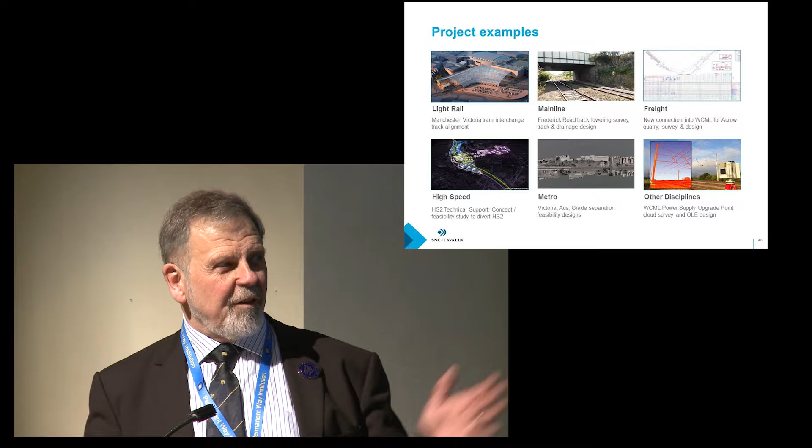I had to try and think of something to put in other disciplines, but what I've picked is the work we've done on the West Coast Main Line power upgrade, and the use of advanced survey techniques to allow us to see where the overhead line equipment is. We just saw a really good example of that as well with the Stafford Alliance, trying to work out where a gantry is relative to the overhead line wires. But the same technology and the same techniques are used in the initial design and the design of overhead line upgrades.

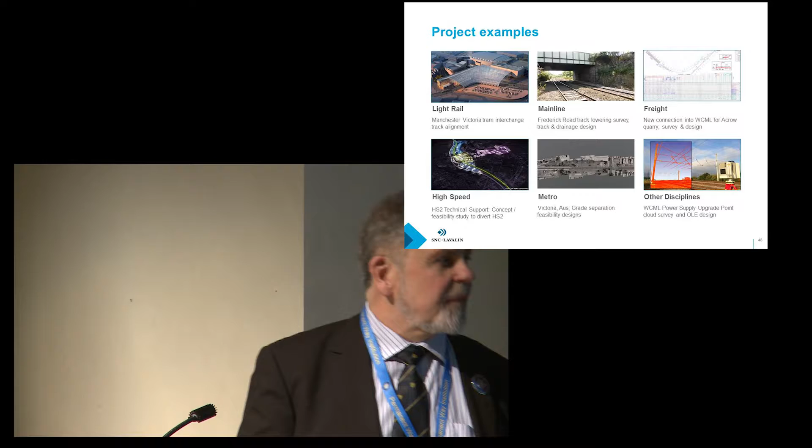But the important point is it comes back at some stage into operations and maintenance, and I think as designers we must never lose sight of the fact that what we're designing has got to serve a purpose and ultimately become an asset that provides the railway, and then has to be operated and maintained.

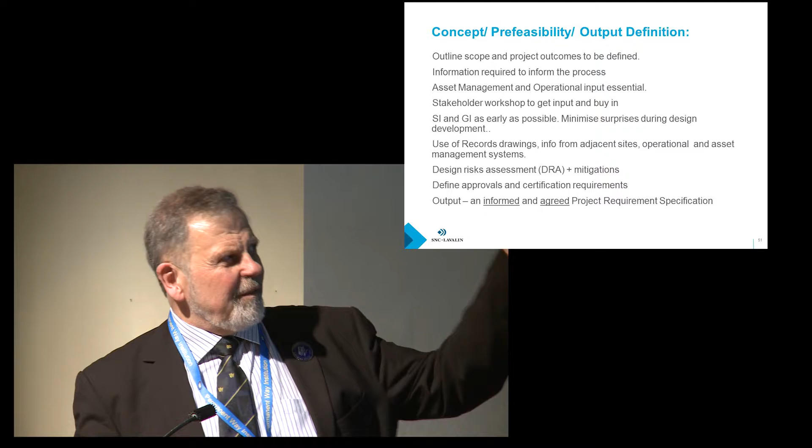Obviously, there are numerous stakeholders in any project, so get them together, get their information, and get that downloaded.

Invest in site investigation, invest in ground investigations, invest in whatever survey requirements you need at that stage. Often not a popular decision to spend money up front at such an early stage in a project, but if you haven't got the records and information available, do get that information and use it in your deliberations as you start to define what you're trying to achieve.

I've mentioned the drawings. It's often the case that adjacent projects or adjacent works can feed quite useful data into the process.

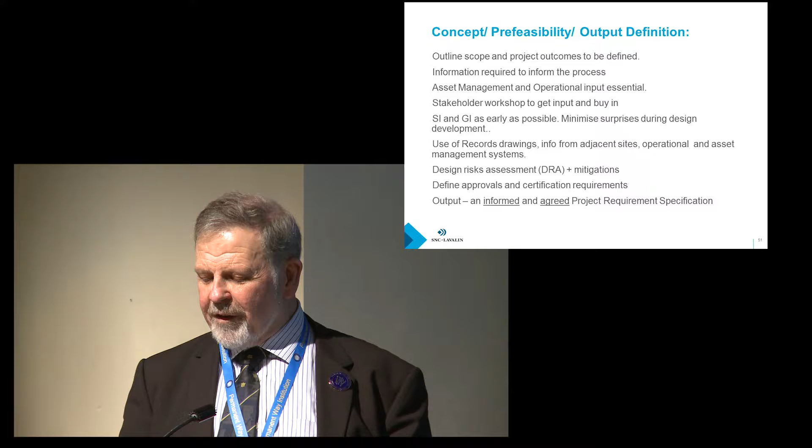Now's the time also to start thinking about risk. What are the risks that might be encountered as you go forward? And it does no harm to start the risk register at this time.

Another key issue, again we've heard mention of this today - ultimately you've got to deliver this, and you've got to seek approval and certification for said project. So be mindful of the regulations you're working under, the current standards, etc, and be very conscious of the fact that part of the definition is that you've got to achieve the appropriate standards for approval.

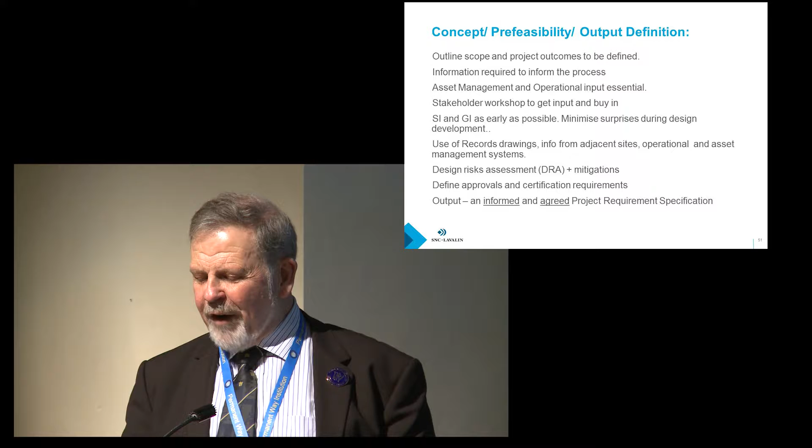So the key message really is to devote time, energy, and resource to defining the project requirement specification. And that project specification has to be informed and agreed - with all the information available to the team putting this together, and with the agreement of the stakeholders.

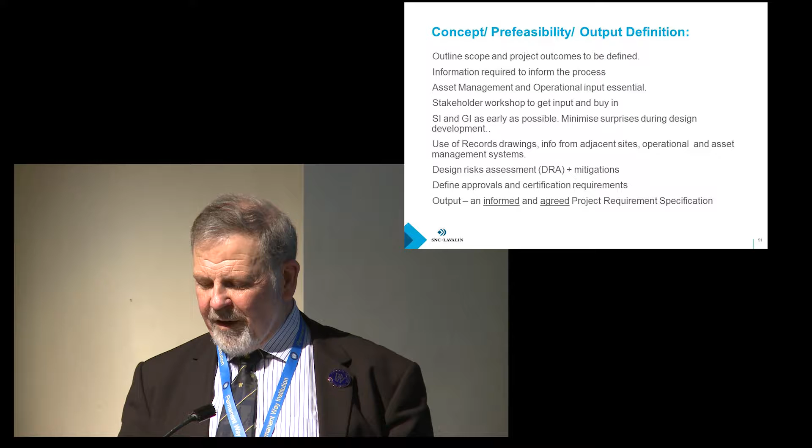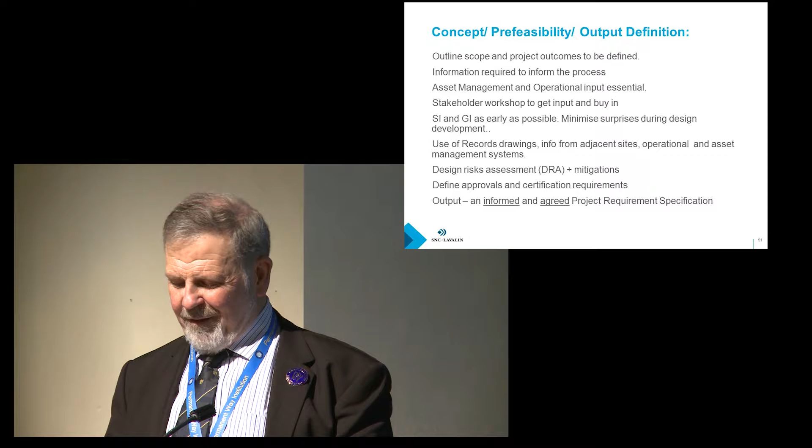And I'll probably say this again, but don't be tempted to try and put these things off to later in the project cycle, because inevitably that leads a road to perhaps rack and ruin. So you try and address these issues early on and up front.

And very impressively, in my view, one's able to come up with some quite detailed options and alignment options, enough certainly for people to assess that option and to decide if this is what needs to be required or not, and to firm up on the specification. Certainly adequate accuracy to undertake any planning or engineering feasibility study.

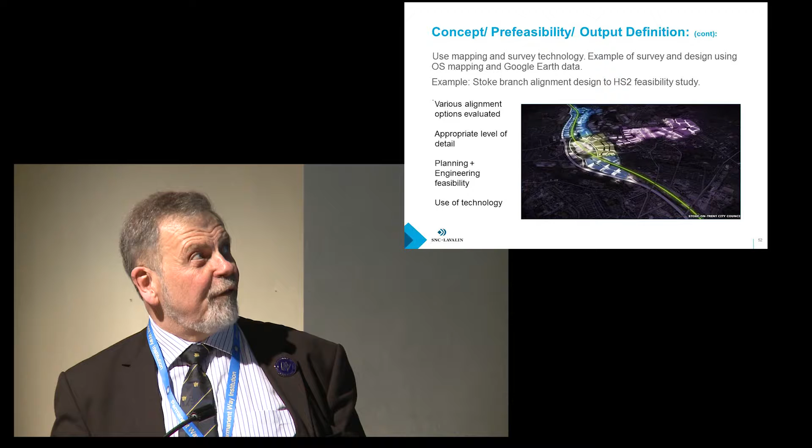So it's a good example of the technology that's available to all of us currently to undertake a feasibility study, and then ultimately to feed that into an output definition if the project is decided to proceed.

We then move into where we're trying to firm up, and we're trying to actually detail the feasibility and select the appropriate option. So working the options up into more detail.

Important that one starts to consider here not only the first cost, the cost of undertaking the work, but starting to consider the whole life cost. And we've heard that mentioned. We've also heard safety cost model mentioned today, which is another way of assessing the economics of a potential project.

It's very important that you have a strong design management process for the project so that you can start to really nail down the deliverables and get those things delivered on time. Yet again, any delay or failure to provide the right information at that time can be pretty fundamentally poor and affect the outcome. You need competent people, and I'm going to come to that in a moment.

How do we ensure we've got competent people to deliver these kind of works? You're going to see the word collaboration on more than one slide. Very important, I think, that each party works together to a common end in a collaborative way. Confrontation in this instance doesn't help at all. It's all about having shared and agreed goals.

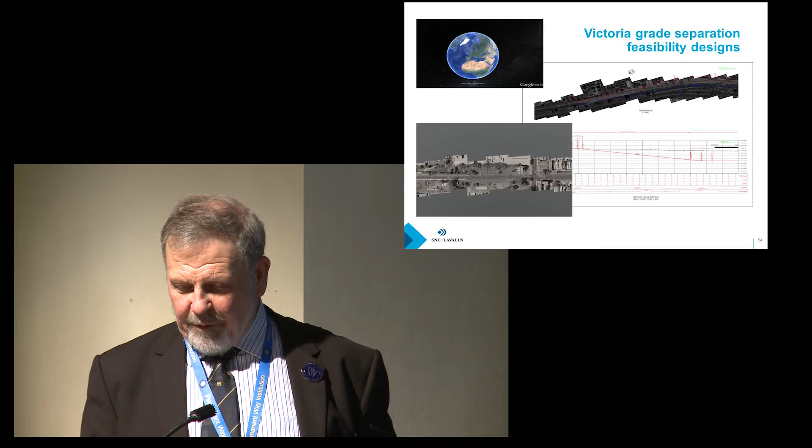I'm going to have to skate on a little bit, so I'm running on. Here's the single option developing, and again, this is about involving the other disciplines, keeping people informed, looking at value add and cost savings, and trying to find efficiencies in the construction methodologies. Again, strong project management, and again, the collaborative approach.

The example I've used here, and this is where I had my thunder stolen - I was going to use the same quote from Chris. I worked with Chris when I was in Network Rail to help develop the standards for surveying, and I remember him saying 'survey once, use many times' - it's copyright Chris Preston, but it's already been used once today.

If you can establish the survey grid early on, you can start to use various information - LiDAR or whatever - and that information can be used and taken forward into the other phases of a project: the final design, the construction, and even into operations and maintenance. The West Coast route upgrade is a great example, where the through alignment design is now used routinely to maintain the railway.

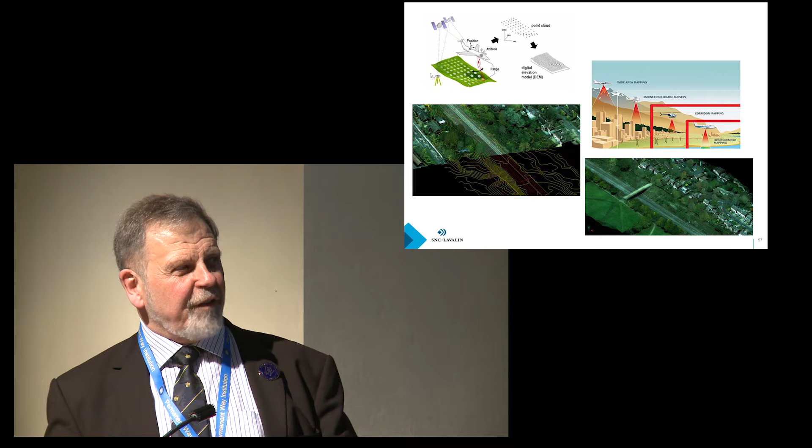These slides show the various technologies - LiDAR survey by air, effectively homing in but being able to gather more and more detail in the 3D model, sufficient to develop the design, and then ultimately produce the 3D manifestation of the proposed design alignment.

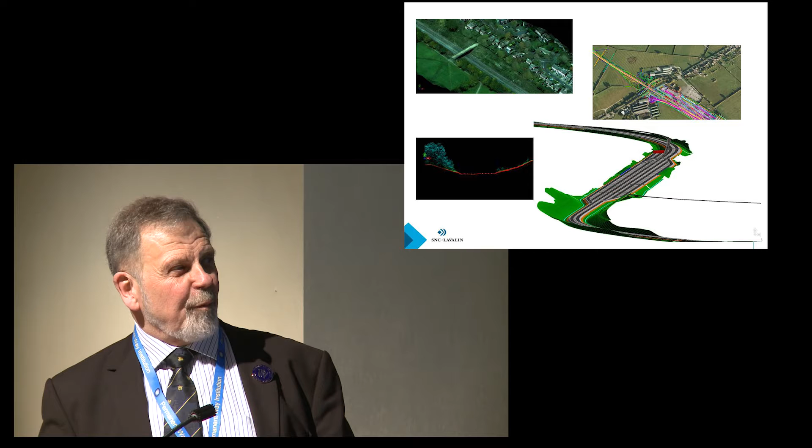I've got 60 seconds now, apparently. The design needs to be compliant. We need to look at any non-compliance.

Pragmatic engineering - I had the pleasure of reading through and being one of the judges on the papers competition that goes alongside this conference, and one of the things that really shone through was the use of pragmatic engineering, not just slavishly following standards, but applying some engineering judgment. In fact, the winning paper was a glowing example of that.

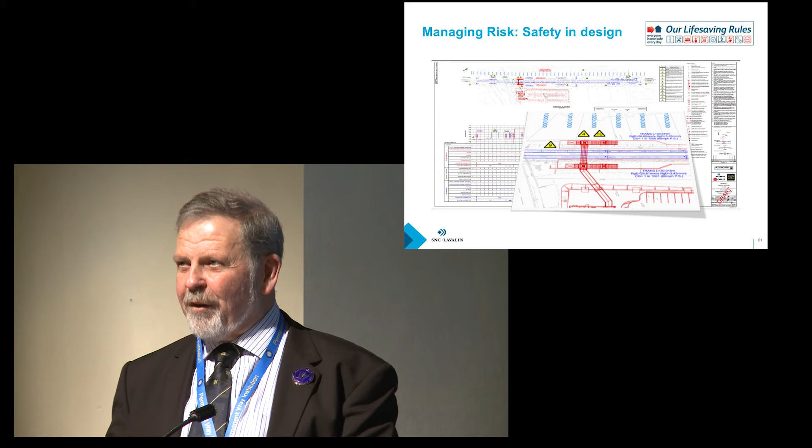That ultimately is being used by the contracting organisations as they deliver, to communicate and convey the potential risks and hazards to the people undertaking the work. And ultimately that information can transfer into maintenance. So through the construction phase, the key message here is about trying to learn and transfer knowledge.

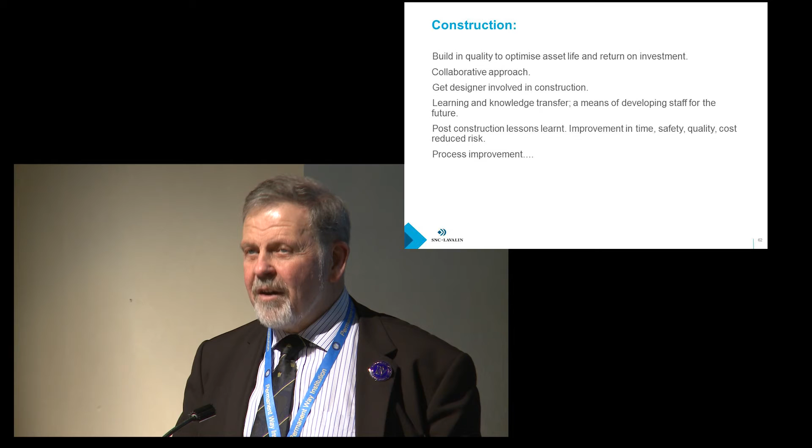We have a challenge, I think, as managers and leaders in the railway industry currently - if we're not careful, we can all work in silos. The designer's the designer, the constructor's the constructor, the maintainer's the maintainer. And if we're not careful, people in those various areas don't get the opportunity to understand what's required when undertaking construction, and what's a good design versus a bad design from that point of view.

So we need to find strategies to ensure people can gain that knowledge, perhaps by putting them out on site when the job is being constructed, or inviting the construction guys into the design reviews at that stage. And of course, another great mechanism for that is this institution itself - it's all about sharing knowledge, and please take that opportunity.

And ultimately, the aim is to complete the project and get it back into operations and maintenance - not just throw it over the wall and run away, but make sure that the data is available and passed on, and the asset management systems, etc., are updated.

And also spend some time doing what we've done on these projects - review what you've learned, take that learning and disseminate it, try to embed it into your future work, and try to share it through whatever means.

There's no rocket science in any of this - it's all about just thinking these things through, working together in a collaborative way, and trying to address the challenges I talked about of how we share knowledge across all of the aspects, all of the boundaries of the asset life cycle and the project life cycle. And I have overrun, I do apologise, but thank you very much for your time.